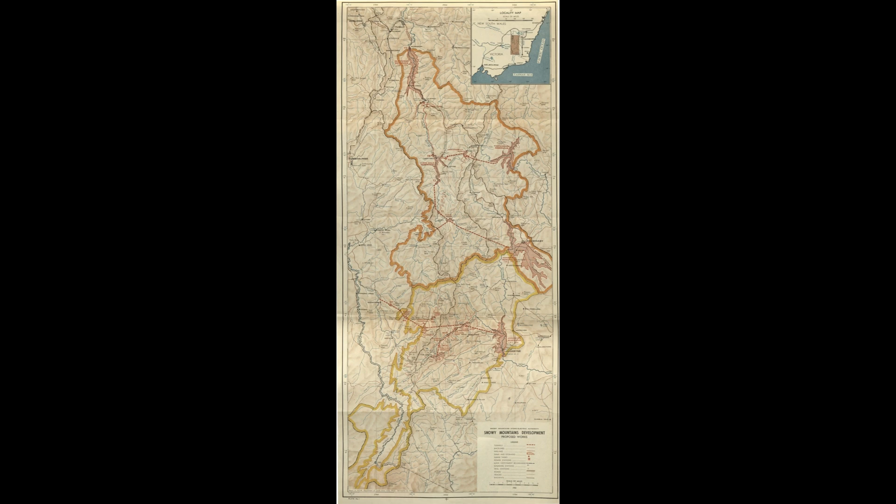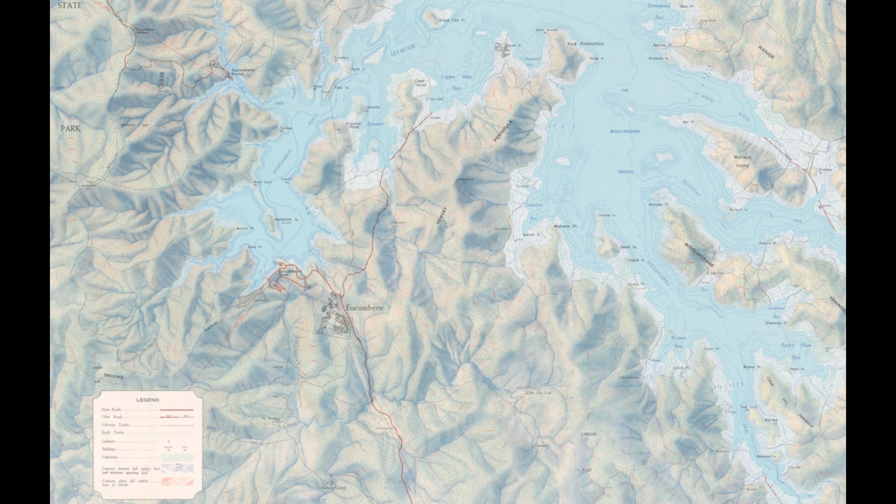The original plans, as illustrated, had the 2 schemes separate from one another, and so progress had occurred with the Snowy Tumut development, leaving the Snowy Murray development to be further detailed and explored. The need for a pumping station would prevent practical transfers of the volume of water needed for the Snowy Murray development, and so a new link to Lake Eucumbene was needed to provide and enable gravity transfers to take place, as well as store seasonal runoff from the Snowy River catchment.

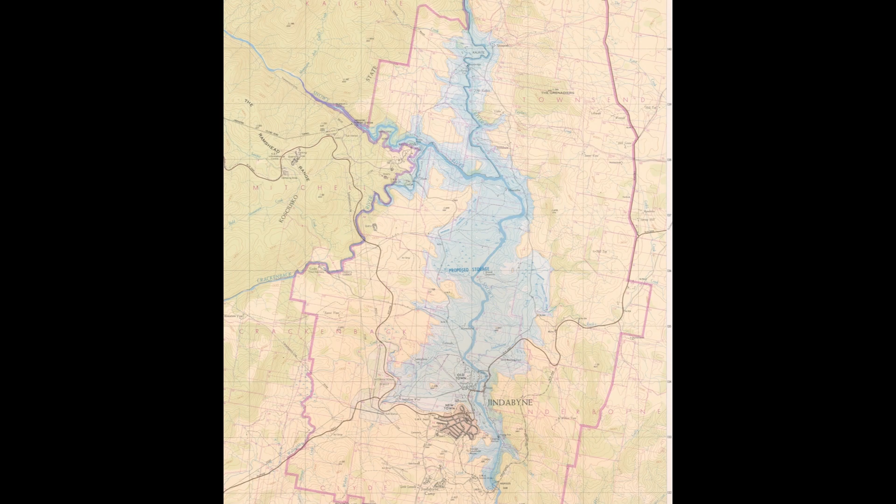Lake Jindabyne would still proceed as per the original plans to provide storage, and much like Lake Eucumbene flooding at Adaminaby would result in the flooding of the former township of Jindabyne, sited lower in the valley alongside the Snowy River.

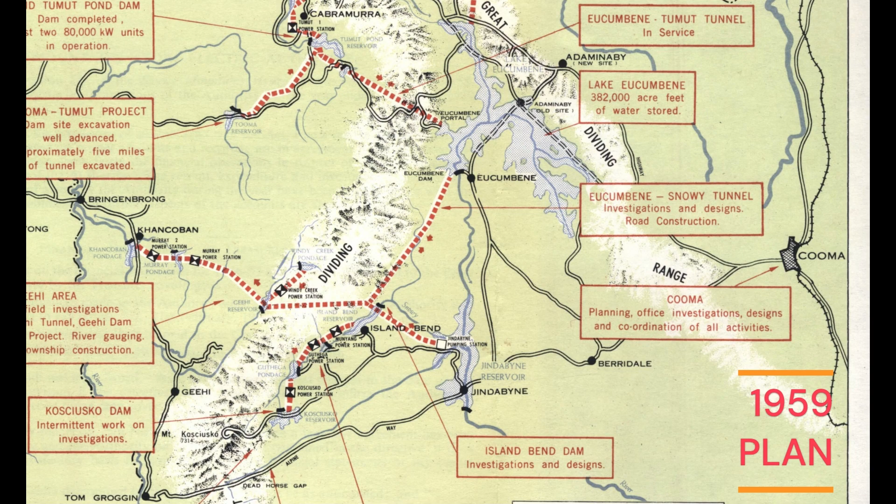Now, the key reason water from Lake Jindabyne is pumped is due to early investigations around the Geehi Dam site, concluding that conditions were unsuitable and that it would need to be relocated roughly 4 to 5 kilometres upstream as part of a high-level diversion, shown here in yellow, with the original alignment shown in red.

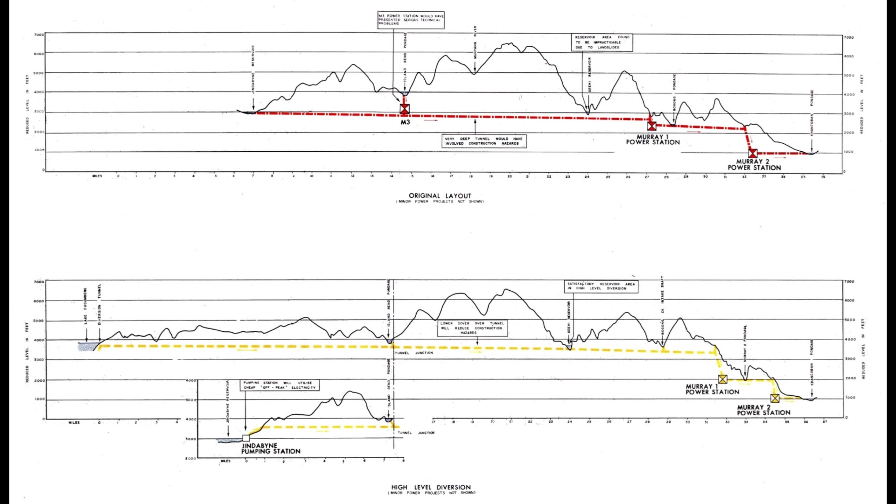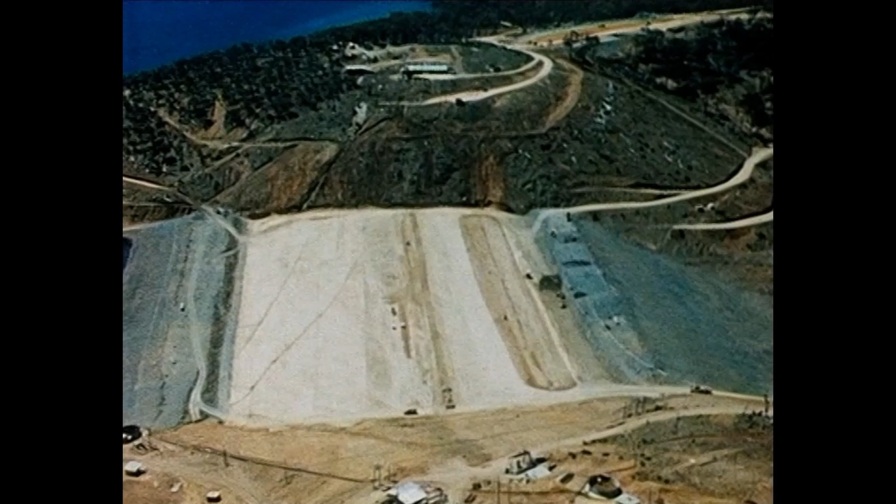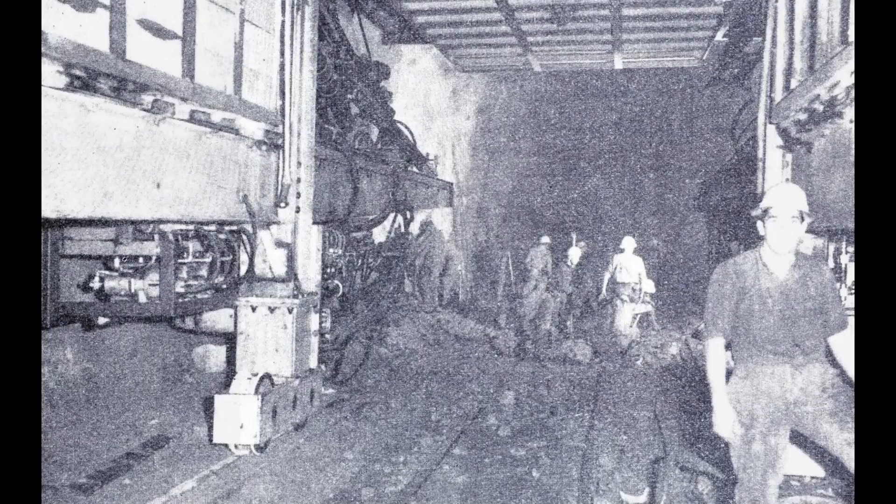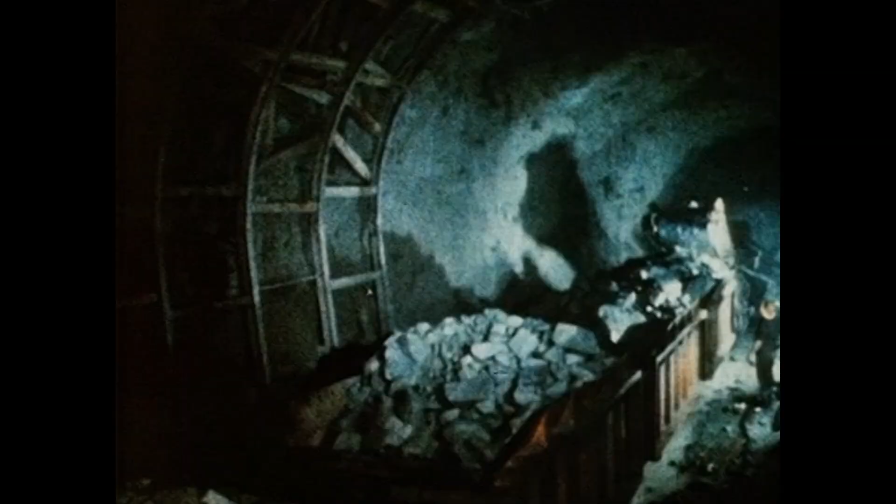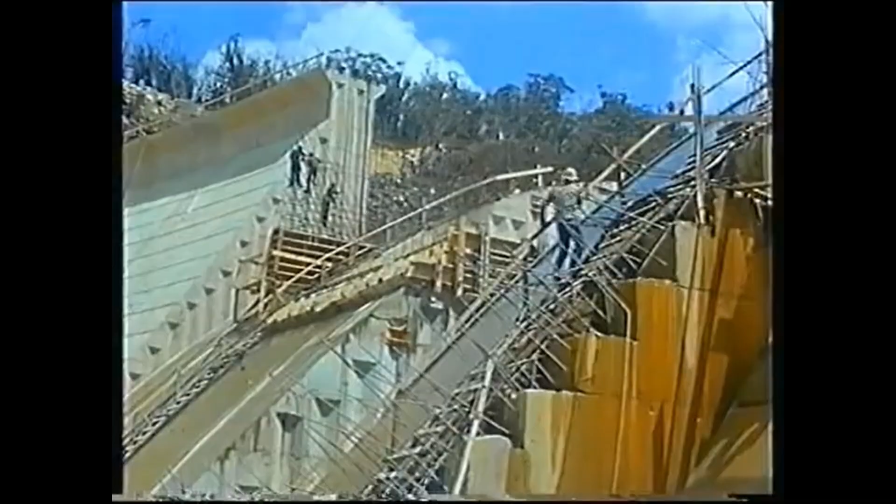And so, the first new component outside of the Guthega system within the Snowy Murray scheme would be the Eucumbene Snowy Tunnel, which, although likely a frustrating change of plans, did actually result in more water being able to be stored within Lake Eucumbene sooner than anticipated, mainly due to its link to Island Bend. Island Bend, like Junction Shaft in the Snowy Tumut development, would serve as a critical junction point within this southern development.

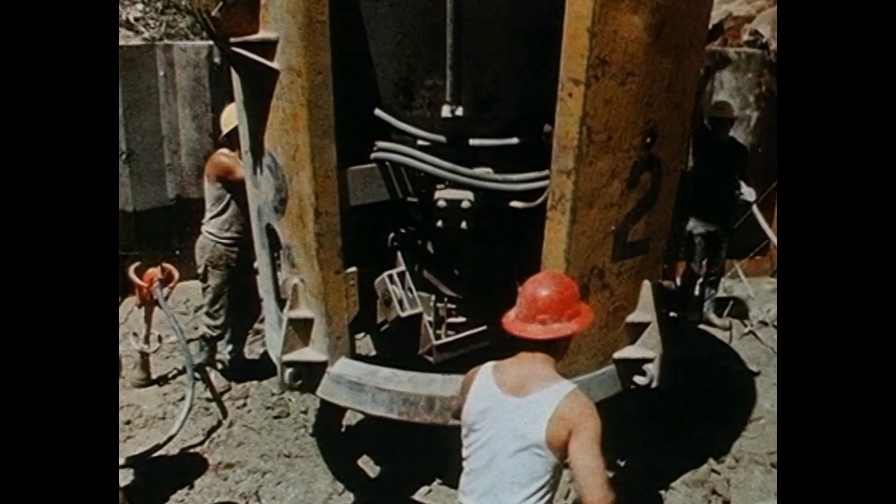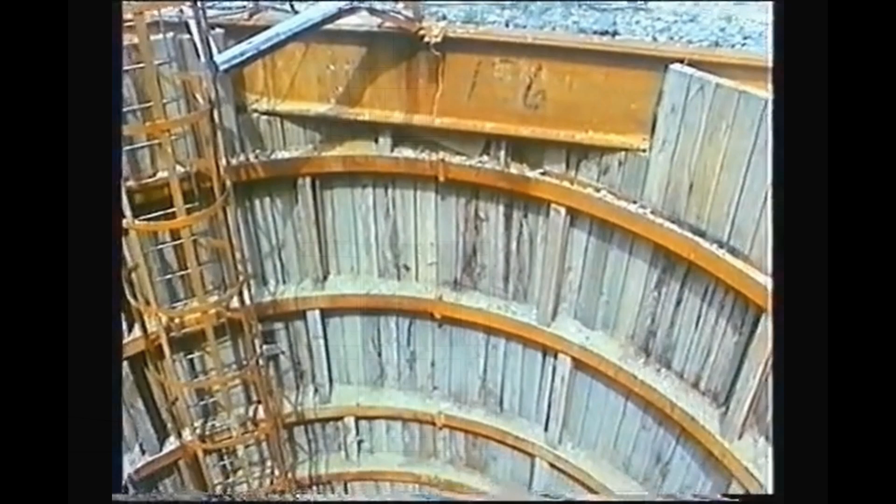Commenced in 1961, this dam would take 4 years to construct, alongside its drop shaft structure, serving as the outlet portal, and being completed in 1965 alongside the Eucumbene Snowy Tunnel and Snowy Geehi Tunnel shortly afterwards. Located below the Guthega Power Station, it would impound the water from the upper Snowy River and enable it to be transferred to Geehi Reservoir for energy production through the Murray Power Stations, or transferred to Lake Eucumbene for long-term storage and diversion back towards Geehi when demand requires it.

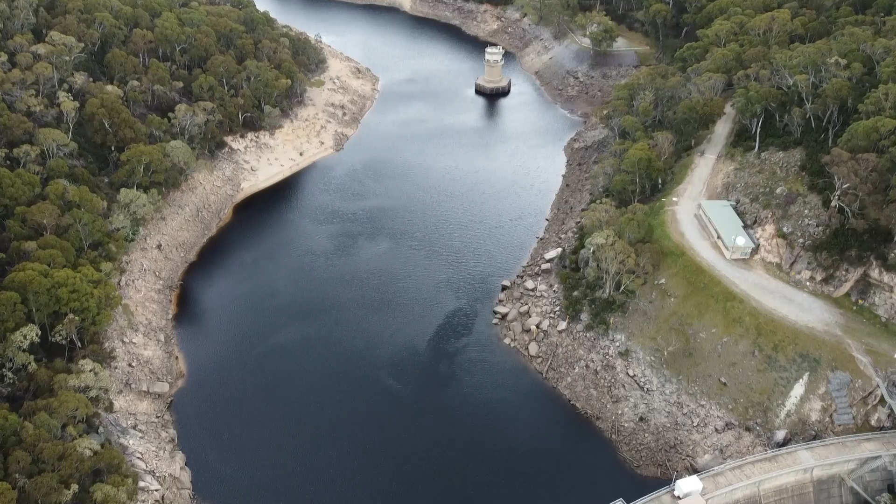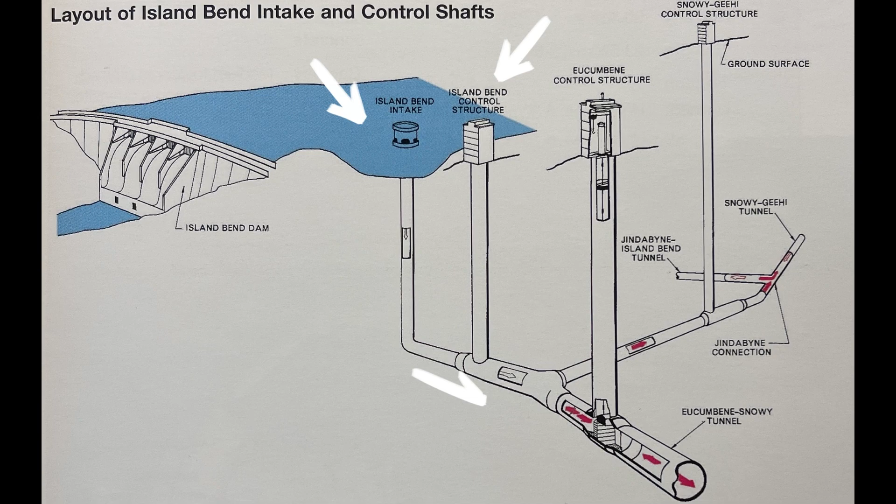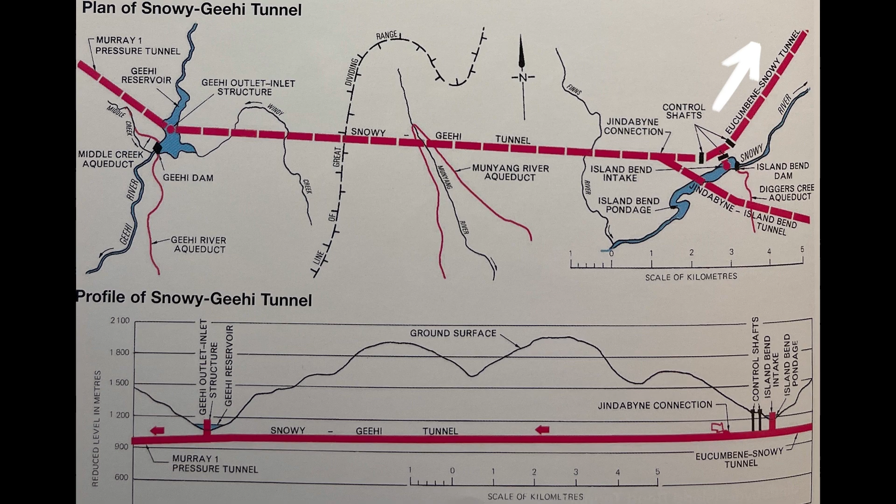Once water enters the outlet shaft from Island Bend, numerous control structures enable the various diversion and flow regimes to take place. Seen here are the outlets to the Island Bend, Eucumbene, and Snowy Geehi control structures in cross-section. Using the Island Bend and Snowy Geehi structures would let water flow towards Geehi Reservoir. Closing the Snowy Geehi structure and opening the Eucumbene structure permits reverse flow through the Eucumbene Snowy Tunnel back towards Lake Eucumbene. The Snowy Geehi Tunnel, approximately 14.4 kilometres in length and being less than 14% lined, connects the Island Bend development to Geehi Reservoir and its inlet-outlet structure.

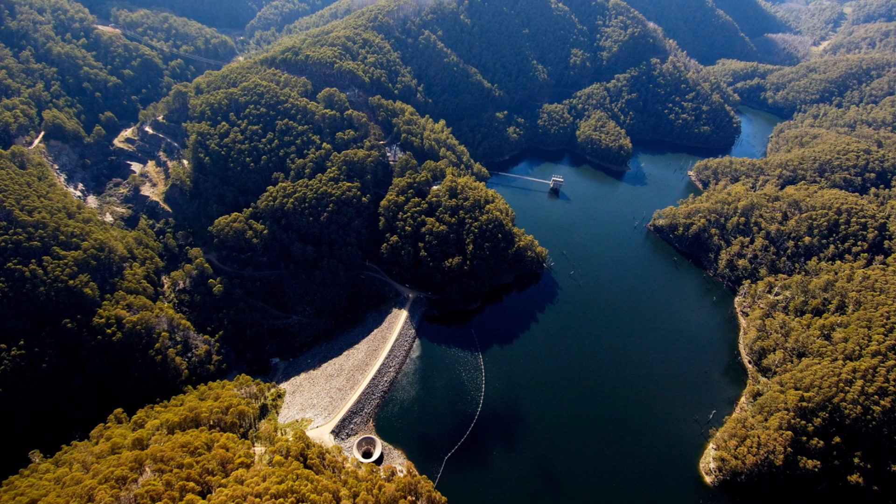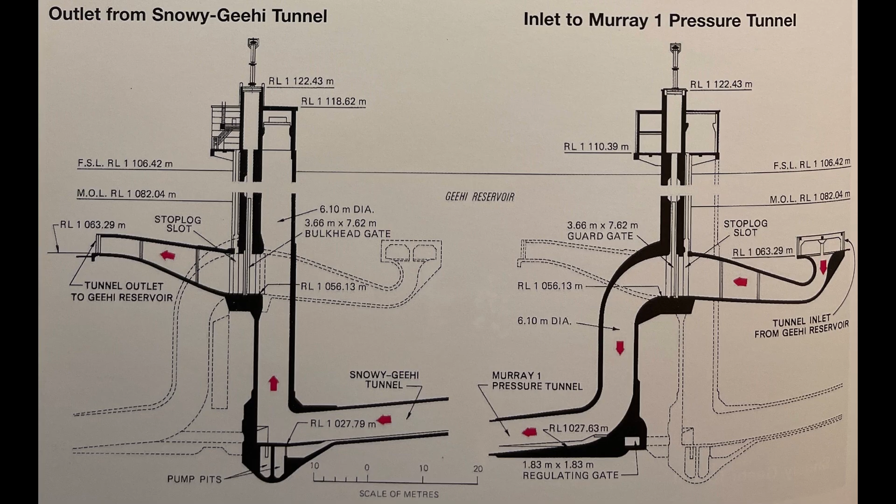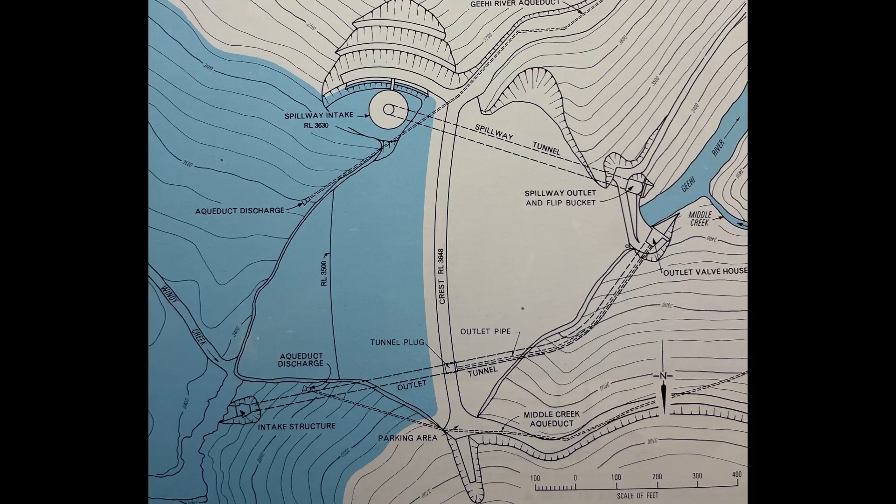This particular structure, I feel, is the most complex out of all built within the Snowy Hydro scheme, as it integrates both inlet and outlet functions as well as their control gates within the same structure, and incorporates a small bypass regulation gate. Construction of Geehi Dam, its diversion outlet, and the inlet-outlet structure noted before would happen between 1962 and 1966, and once ready for use, permit the closure and sealing of the diversion tunnel beneath Geehi Dam,

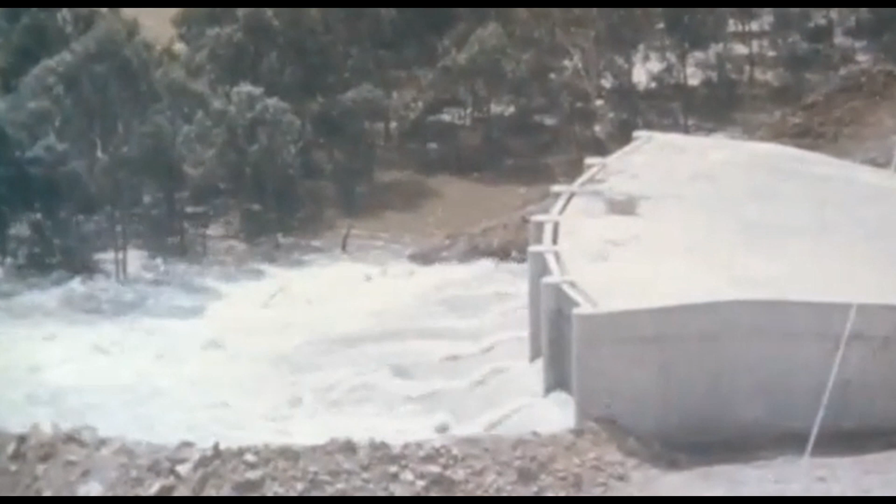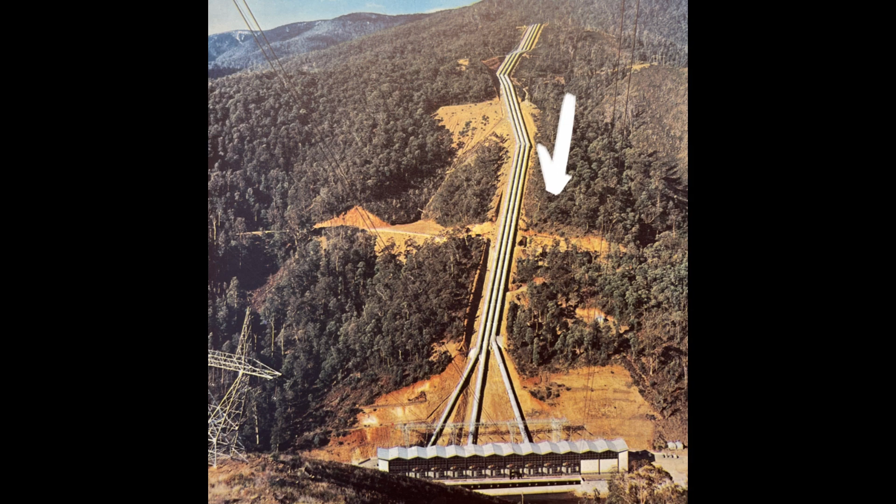as can be seen here. With these key elements of the lower Snowy development underway, and in parallel to these works, was the beginnings of the Murray 1 power station also taking place. Murray 1 power station, seen here, would receive waters from Geehi Reservoir via the Murray 1 pressure tunnel and pressure pipelines, dropping several hundred metres down the mountain range once daylighting from below ground. Within the power station itself are 10 turbines and generators, producing some 950 megawatts of generating capacity, the largest within the scheme up to this point in its construction history.

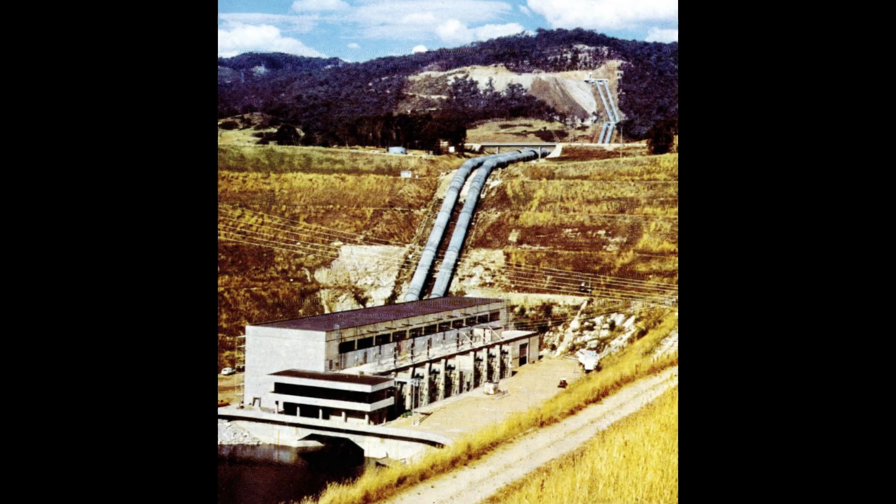At this point within the scheme's development, Murray 2, its power station, tunnels, pipelines, and dam were not yet awarded and under construction, which meant water leaving Murray 1 flowed unrestrained into the Khancoban Back Creek towards the pondage under construction. This meant a retarding structure, or weir, would be needed to maintain adequate back pressure on the power station turbines, and though not easily visible, its outline is only just perceivable via aerial imagery. This image, taken from the annual report from Snowy Hydro, better shows the weir and it functioning during this early stage, but typically this structure would be inundated once Murray 2 was commissioned and put to use.

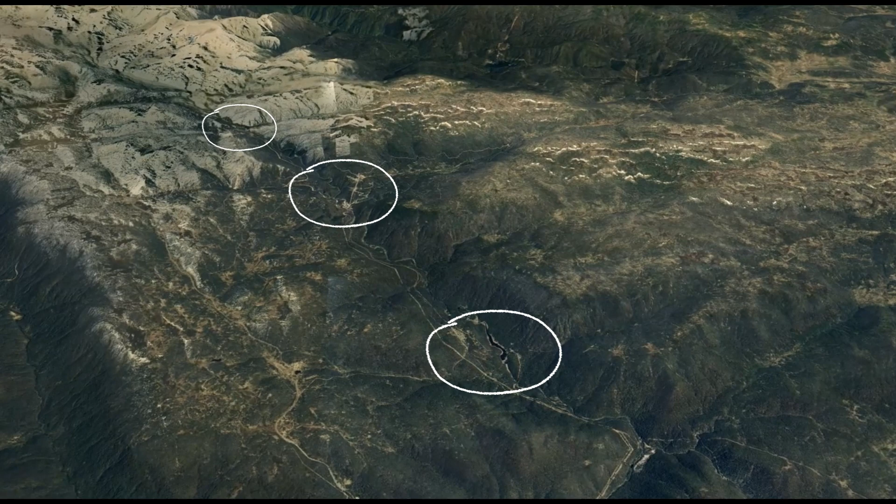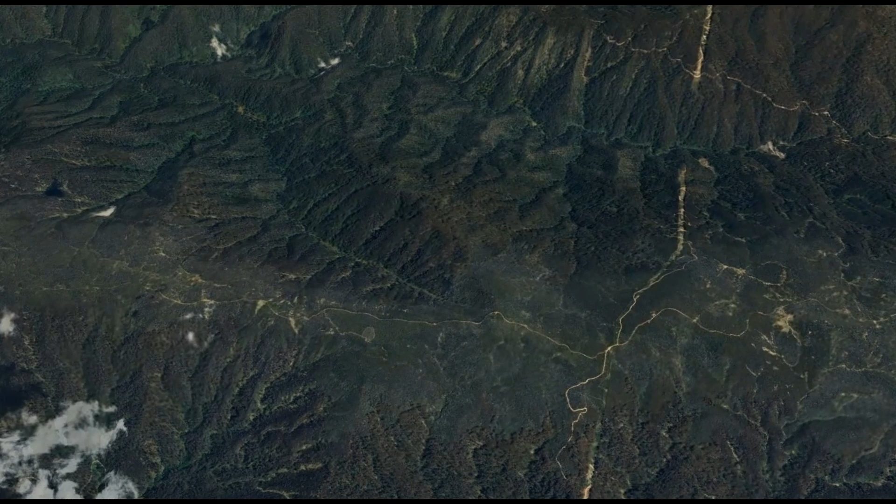With numerous Snowy Murray components now ready for use, water could be diverted from the Snowy catchment via Island Bend, fed by Guthega and its power station. From Island Bend, it enters the Trans-Mountain Tunnel system, sending water through the Great Dividing Range towards Geehi Reservoir, which would still receive its own inflows from the Geehi River. From here, it enters a further pressure tunnel system, daylighting at the Murray 1 development, before flowing unregulated down the Khancoban Back Creek towards Khancoban Pondage, still under construction, which provides a great segue into the last element constructed under this initial stage of the wider Snowy Murray scheme, the Khancoban Pondage.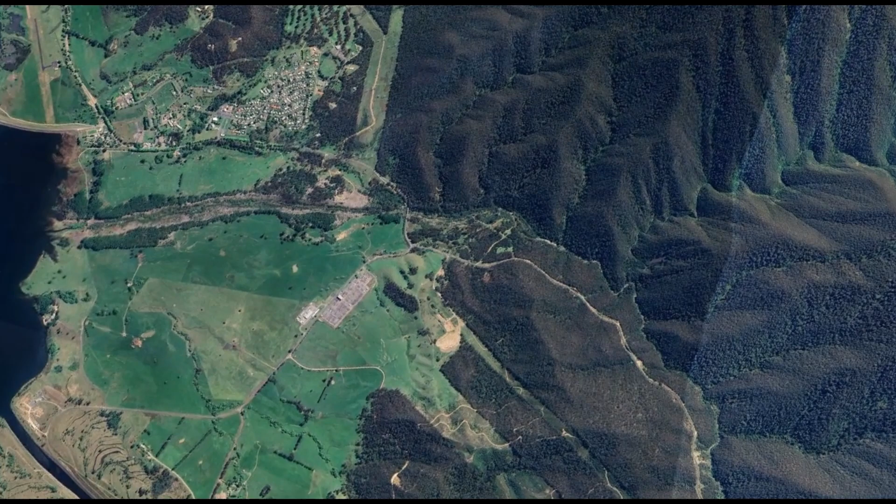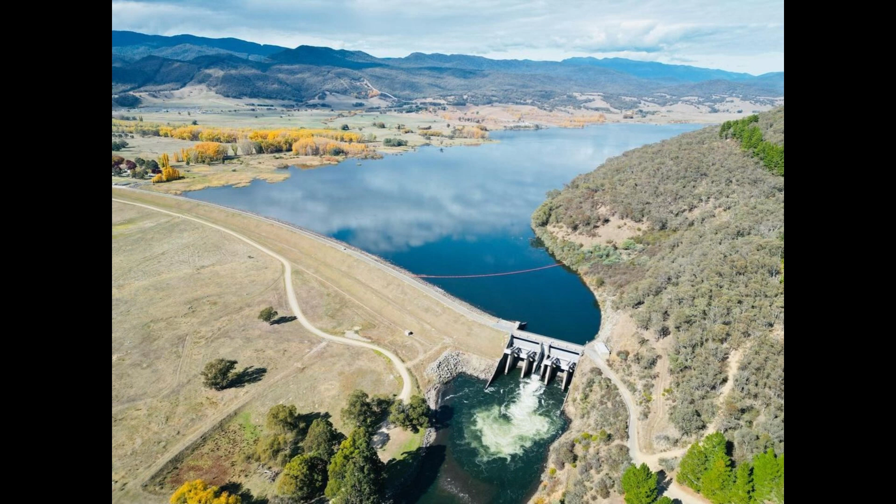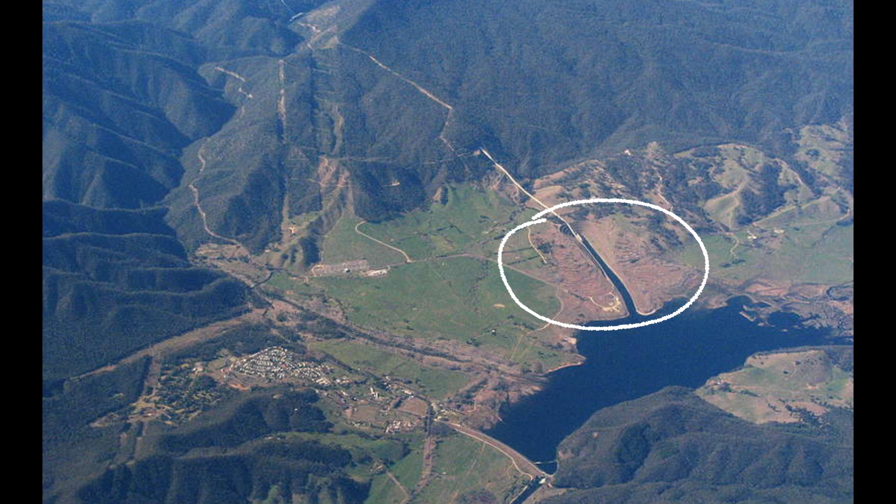Khancoban Pondage and its dam are the final point where water collects before leaving the Snowy Murray scheme and flowing towards the Murray River and Lake Hume. The dam itself is a basic earth-fill dam, less than 20 metres in height, but roughly 1 kilometre in length. Ingeniously, the engineers designing the scheme sought to utilise fill for Khancoban Dam from the tailwater channel being excavated for Murray 2's power station, likely providing cost savings in the process between the two projects. The dam itself has no power station, unlike Blowering in the Snowy Tumut development, instead serving purely as a regulation structure via 2 large control radial gates and a third smaller one, enabling the release of water into the Swampy Plain River, which later joins the Murray downstream.

This structure would be commissioned in 1966 and result in the first stage of the lower Snowy Murray development being brought online and further contribute an additional 950 megawatts of energy across Victoria, New South Wales, and Canberra. It would also increase water used for irrigation via its ability to shift runoff and snowmelt across the Great Dividing Range from the Snowy River catchment. So, we're now well past 1949. In fact, we're some 15 or so years in, amongst the mid to late 1960s. The Upper Tumut development is complete and operating, gradually repaying its investment back to the Australian public via the energy being supplied. We're also in a totally new space now, with the waters from the Snowy and Upper Tumut rivers being captured, regulated, and with respect to the Snowy River, diverted inland, away from its natural course towards Gippsland, Victoria, instead towards the Murray River, its irrigation districts, and mouth in South Australia.

From an energy generation perspective, we're only just a little bit short of the halfway point of the scheme's total capacity of 3,740 megawatts, with roughly 43%, or 1,610 megawatts, now available, with Murray 1 being brought online and supplying a growing nation from an industrial and commercial perspective. The next episode looks to the remainder of the Snowy Murray development, which will occur over the next 5 years, between 1964 and ending in 1969, having already partially commenced through Murray 1's construction, and now focusing on the remaining elements of the Murray 2 power station, the Jindabyne Dam, and the Jindabyne pumping station, along with the pressure tunnels linking them, needing completion and commissioning.